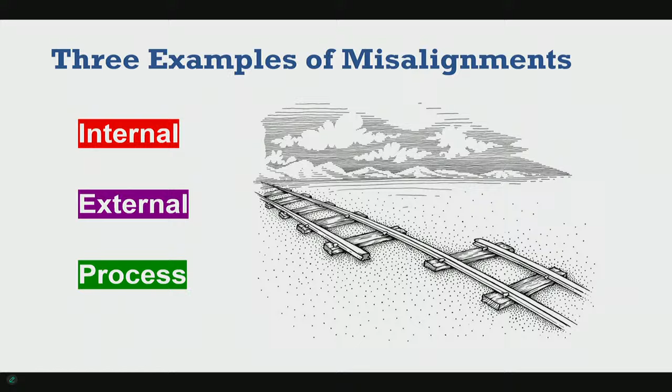So we're going to go forward with an example. One thing we've been looking at as an initial example is active transportation - just one of the first things we're going to look at, to give you an idea of some of the analysis and things we're looking at as we move forward.

When it comes to active transportation, we've got the 2020 Parks and Trails Open Space Plan and the 2016 Bike and Ped Plan. Written up here are the goals of those plans. I know these have come before you as a council and been approved and adopted, so we don't need to review those specifically, but these are the goals of the plans.

As we dove into it, we looked at the costs associated with the projects proposed in the plans, and also looked at some of the impact fee revenues, and noticed there might be a bit of a gap. At this point, we want to continue coordinating with city staff on how these different projects are funded.

But maybe when we talk about misalignment, looking at the recommendation of let's review, if the goal is to implement these plans, let's look at the funding resources and make sure we're able to. And again, this is very high level initial analysis, so this is where we would coordinate with the staff to make sure we're providing a recommendation that's implementable for the city.

We have a question from Councilman McComber. I just think a key point, because we have a lot of residents here, and they can get a little confused because they don't do this day-to-day, is this doesn't take into account when a developer is putting in the trail and that is going to fund that, and then it's turned over to the city.

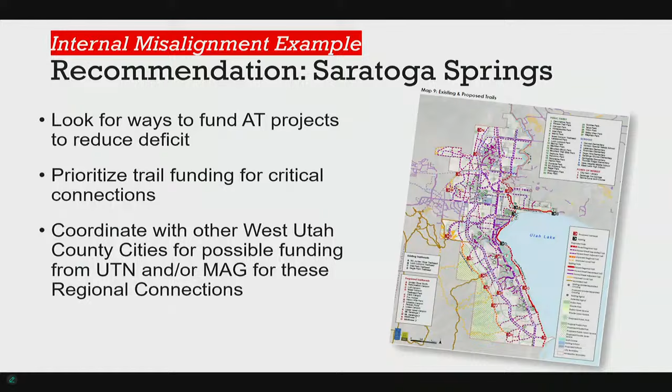And I just want to say it's very high level. And again, as we move forward, we're going to work with the staff, and Mark, thank you for your input, to make sure as we look at recommendations and things that we're talking with your staff and making sure everything is right. But just taking a quick high level look based on those studies, this is an example of what does a recommendation look like? It would be, hey, let's take a look at some of these, and make sure we're on the same page with moving forward and getting these funded, because we all want these trails and things to go in.

So an example of an external alignment or misalignment would be, again, looking at your trails and your master plans, is just looking at the connections between the cities. And I know as part of this project, working with Saratoga Springs and Eagle Mountain in the past, both these cities, as well as the other cities included in the study, do coordinate a lot. So I don't want you to think there's not any coordination going on.

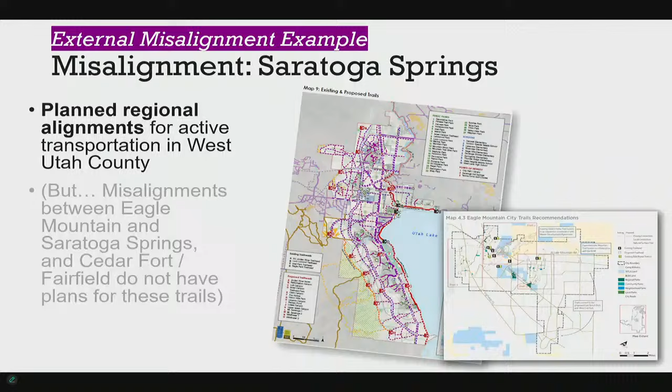But looking at those plans, looking at potential small tweaks to where those trails and things connect between Eagle Mountain and Saratoga Springs. There's also some on the long-range planning for Cedar Fort and Fairfield, where Eagle Mountain has trails planned, but those cities don't have plans. So really, the recommendation would be taking a high-level look, working together, and utilizing the Utah Trail Network, and looking at a regional backbone for trails.

Got another question from Councilman Carn. When we look at West Utah County, why is Lehi not in that conversation? West Lehi. Yeah, that's a good question. I guess I wasn't a part of negotiating and figuring out exactly who was included in the study. But I do know there was a line drawn. I don't know, Tippy, if you have.

I can actually address that. When they were looking at this, we both had, Eagle Mountain and Saratoga both had funding requests in.

That were comparable, so it made sense to partner us together. Lehi was kind of doing their own thing, and adding Lehi would have compounded the complexity quite a bit. So we're not saying we won't partner with them.

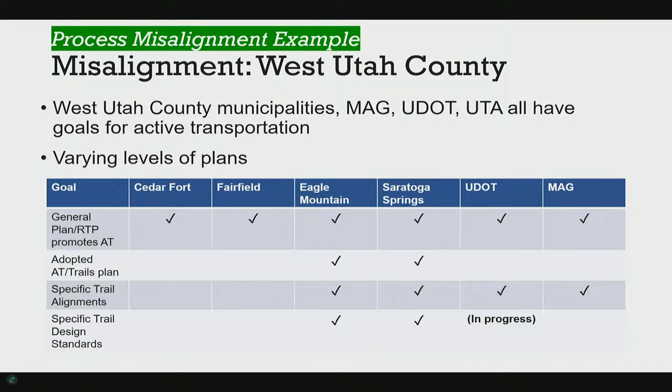Kind of, the other thing we looked at is some of the timing of these plans. We understand that sometimes it's tough to try and align with everyone else to get plans done at the same time. But when you see one plan done in 2015 and one done in 2025, it always makes it hard to stay completely aligned, because things change almost daily. So one of the recommendations, a very high-level recommendation as part of the study, would be: what is a way where we can try and get those planning efforts a little more aligned, to be done around the same time?

Is there a regional plan we can do, maybe as part of the West Utah County area, or what are some things we can do to try and align when we do those plans? That would be maybe a recommendation as part of the plan. And that's an example - that's kind of an initial, high-level example of what we're looking to do based on all of your studies and things like that.

As we've talked about today, active transportation, there's a lot of other topics. As we meet in August, we'd love to get your input and see what are your top priorities. So if you want to take a minute and think about it - we have a list of some of the other topics we're going to be looking at as part of this study - what are some of those topics that are the highest priority to you?

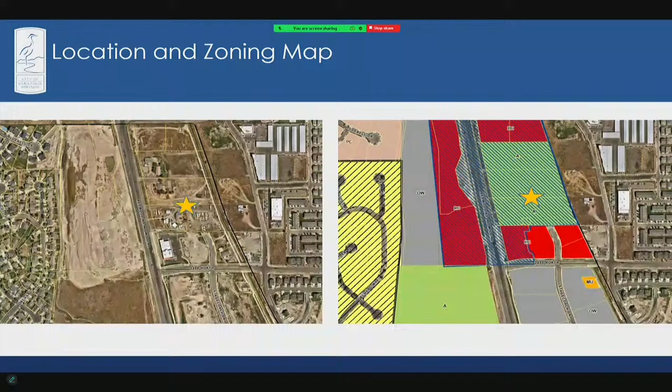Good evening, Mayor and City Council. This is a change of zone request in the north part of town, right on the northern border of the town on Redwood Road, 2472 North Redwood Road, to be precise. You can see here on the zoning map on the right, there's an area in green, that's agricultural zone. The applicant is proposing to change that to regional commercial. This matches up with our land use map in the general plan, so it's consistent with that.

They've provided a concept plan of what they want to do with that. It's 2 parcels of land. They would propose to potentially do 6 lots on that. These would be commercial lots in the RC zone. The applicant is here tonight if you have any questions for them. Would you like to come up and say anything?

Sorry, I didn't hear the question. You can sit just here if you had anything you wanted to add to your request before the council discusses. No, the plan you see up there now is probably one of our first concepts, and we're probably not going to do a cul-de-sac like that. Okay good, because that was going to be my first question. We're like, what is that? Yeah, no, we discovered we can just divide it into 4 lots on that side, and we have plenty of frontage and area to do that.

Perfect, it's much better. Councilman Wilden, you had a comment? Just, if you have any comment on what type of businesses you're trying to attract there. I don't have any problem with the concept, just curious, more of a curiosity. Being in this zone and with the gateway overlay, we're restricted somewhat in what can go in there, so we're just trying to look and market it with that in mind.

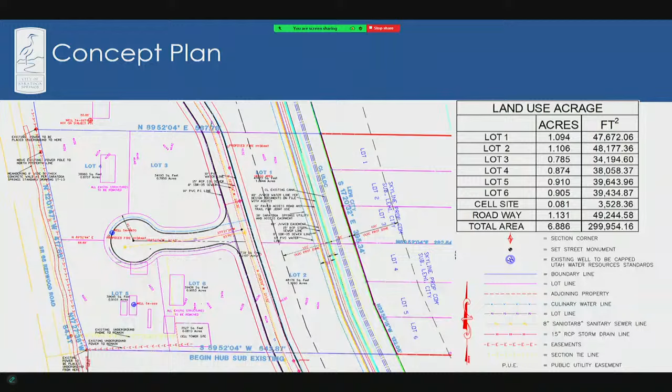Okay, if there's no other discussion, I will entertain a motion. I'll move that we approve business item 1 as stated on the agenda, including all staff finding conditions. Okay, I have a first from Councilman Wilden, second from Councilman Wadman. Any further discussion? Barton? Aye. Comber? Aye. Wadman? Aye. Carn? Aye. Wilden? Aye. Motion passes unanimously.

We have business item 2, the Mountain View Corridor Widening CMT Contract Change Order.

Since Jeremy's not here, I will take it. CMT is doing our construction management for the Mountain project. This is just an amendment to the contract to make sure that we have enough scope to cover the construction cycle. And yes, we are intending on having the project finished by August.

That's the goal. Big conversation going on out there, which is good. When we're communicating, like when people are saying, why are we not waiting for school to get out, it's because you're not ripping up the road the first month of the project. There's other things to do before you rip out the road. That was frustrating me, and I had to bite my tongue because I didn't want to create a conversation. I think that's what these meetings are for, to clarify the steps of a project like that.

I believe we've had the pre-construction meeting with the contractor. They're mobilizing, getting everything done. The first portion of the project will actually be working on the UDOT property, and they will be doing some things that will not be impacting the shoulder. This is what the communication for our residents needs to be. For us it's fine, we understand that, but our residents are asking why are they starting now, when school's not out. There should be an easy timeline out there, showing this is what we do first in a project like this, and UDOT's going to be doing their quarter.

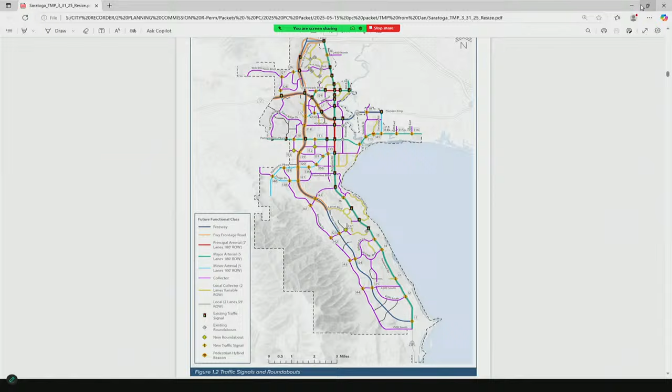We have the Saratoga Springs City Cemetery Site Plan and Preliminary Plat. Sarah, can you pull up that presentation? Good evening, Mayor and Council. This item is for the preliminary plat and associated site plan for Phase 1 of the Saratoga Springs Cemetery, located in Village Plan 9 of the Wildflower Planned Community, just north of Wild Blossom Drive at the northwest corner of the city.

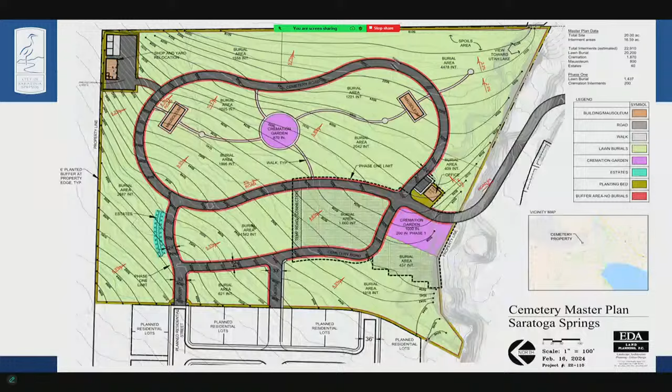Here's the associated preliminary plat. It is for the entirety of the 20-acre site, whereas the site plan itself, like I said, is Phase 1 and comprises approximately 2.5 acres of that overall 20-acre space. As part of this, it does contain...

1,371 grave sites, as well as 265 cremation niches located within a cremation garden, shown on the site plan there. This also includes a temporary office trailer. I have the elevations for which that will be shown on site.

As noted in the staff report, a code amendment will be needed before we can locate that temporary office trailer onto the cemetery property. That is in works and will be brought forward to the council for your approval.

Just a key point, that 1,371 grave sites, that's an actual site because we are potentially allowing double stacking, correct? Correct. So that would be a lot more opportunities.

And again, this is just the first phase. We have the rest of the 20 acres to build out. I was going to ask, how many phases are we anticipating? I don't know, how much do you want to fund up front?

I think it's very prudent that we're starting off with this size. We will know probably within the first year how fast these need to go, and we can certainly add more. Again, the bulk of this project was really to get the infrastructure up there so that we could go.

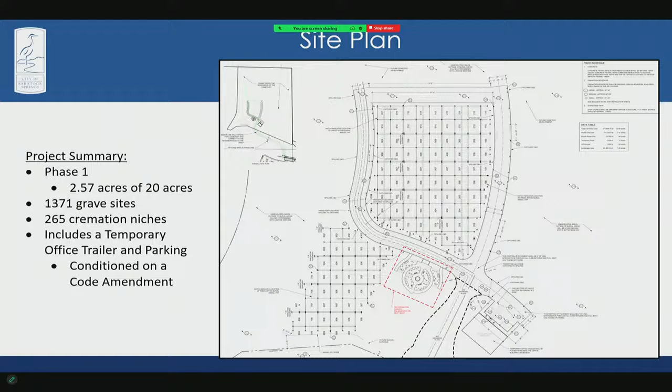Here are those elevations. Like I said, this will require a code amendment that staff is working on and will bring forward. The famous trailer is getting used again.

Is this the wreck trailer? Kind of ironic. Is this Heston's trailer? We moved it. We're gonna die in it. The mayor lived in that. It's a mausoleum. Wasn't this the original city hall? No, we don't have that one. This was down at Ring Road. It's been around for a while, 15 years ago when I got here.

One of the things is when we get done using this trailer, probably after we move into the new city hall, it will get a facelift, a rehab, a refresh paint, clean it, new tile and carpet and all that. We'll rehab it, obviously after the code amendment, and then we'll be able to utilize that on that site for quite some time. It will serve as office space for the park staff that will be working up there, as well as future sales and management and other things.

Can we get a plaque on it that says Mayor's Double Wide? We'll do that happily. I wouldn't, I mean, they were joking about it, but when we're doing this renovation, this is where people are going to be going. They're going to be talking to the sexton and everything, even having some pictures. This trailer's been used in the city for a long time. Let's talk about the history.

Let's be proud of our history that we went from this type of thing where we had offices to what we're building now, to where we're in now and to what we're building.

Was this PD at Ring Road? It was PD originally, a fire station. Fire and police department lived out of it for a time. It was where the firemen used to live before we built housing, then it was an apartment, Public Works. Even some of that is our history, let's capture that.

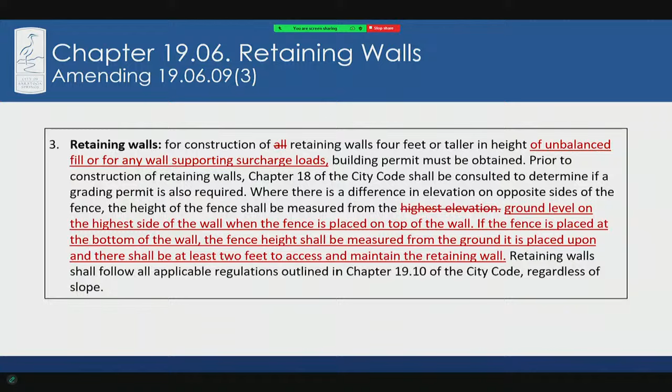Okay, this isn't super complicated. We've just had some differences in building code versus Title 19, and we wanted to clear those up, make retaining walls more safe, and then make sure we are regulating that at both levels. And that's it.

So I'm here for questions. Any questions from staff? No, council? Okay, then I'll entertain a motion.

I move to approve business item 9, amendments to Title 19 Land Development Code, Springs, Chapter 19.06, landscape and fencing for retaining walls, city-initiated, citywide, ordinance 25-37, with any staff findings and conditions. First from Councilman Carn, second from Councilwoman Barton. Any further discussion? McComber, aye. Carn, aye. Wadman, aye. Barton, aye. Wilden, aye.

Motion passes unanimously. We have item 10, the Wildflower Village Plan 5 and Community Plan Amendment Number 4.

All right, good evening again. This is Wildflower's Community Plan 4th Major Amendment and Village Plan 5. So this is the one we had our work session on April 22nd, not too long ago.

Just as a refresher, a community plan amendment includes updates to the grading criteria, creating a new grading criteria within the Wildflower Community Plan. Their grading was approved before we had our hillside ordinance standards in place, and so they've added this grading criteria for only Village 5 and 6, the commercial area shown on the map on the bottom left. This matches our hillside ordinance, which allows up to 25 feet of cut and fill.

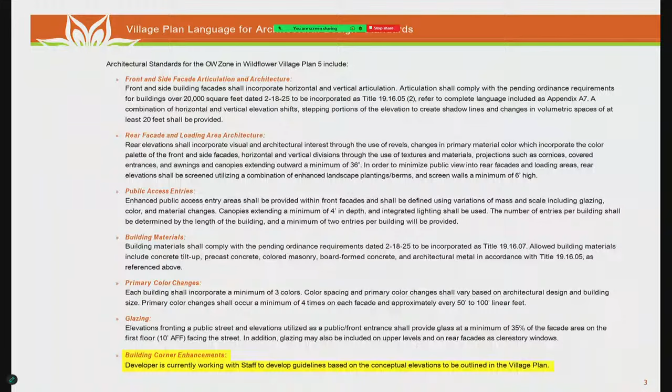The next slide is just our architectural requirements. As Tippy pointed out, we're working with staff, so the highlighted area is the building corners. We recognize we need to address that, and we'll work with staff to have language so there are some standards in there. One thing we wanted to point out is we've done some upgrades we didn't talk about much in the work session regarding the architecture. This is our new design, and Tippy pointed out we need 3 to 4 entries. There will be multiple entries, so we don't have a problem with that. The building is so long that this would be a mid-entry location, so we plan for that so you can see those.

Some of the things we've enhanced our elevations with: we've added signage to both ends so we're addressing the corners, the streets, and the views. We've got enhanced glazing to match the front. It's hard to see because we did a rendering in daylight, but the canopies you see on the corners are illuminated, so at night those entries would have some little extra accents. We've changed the color palette to a more natural, neutral palette that blends better with the hillsides. We've increased the fenestrations, we've got modulated corners, and we've added lighting. It's hard to see, but those linear decorative lights are things we've added to these elevations for you.

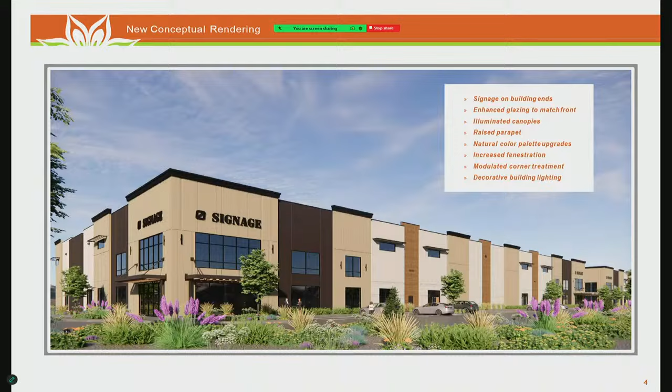Oh, we need to move that down? Yeah, sorry, okay. I like them up there, but too close to the dark sky area. Yes, so those are our architectural changes, and we will work with staff to come up with language that addresses the building corners.

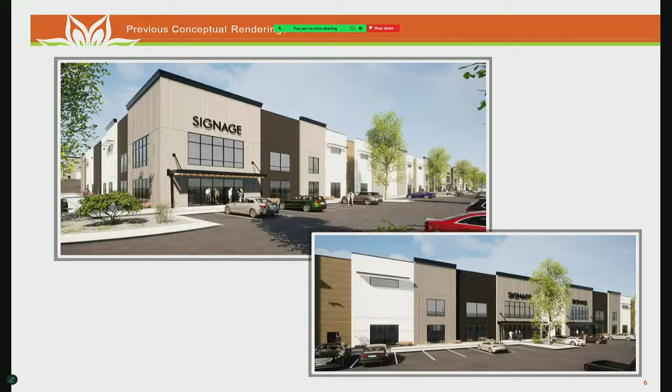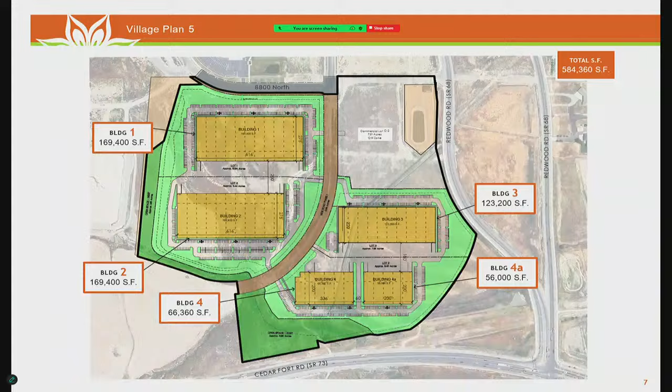Then the next language to be pointed out was the heavy commercial that's in there. We're good, but wanted to discuss with you—I think everybody's had a chance to read the report. Are you good with the process being proposed here, where if we have a user for one of those large buildings 1, 2, or 3, we could make a written request and be placed on a council agenda where we can come in and present to you who that user would be and why it's justified for a single user, because it would be a use desirable to the city. Councilman Wilden has a question on this.

Hey Kevin, just to put you on the spot a little, and you may not have information on this—have you looked at that wording? I want to make sure that process remains legislative versus administrative. I don't want it to come in, the request be made, and it just has to be approved. What request is that again? I apologize. No, that's fine, I know I'm putting you on the spot, but maybe we can come back to that.

It's the heavy commercial, Kevin, where they want to take it to a single user. Okay, let me look at that on my screen. Thank you, I'll be able to see that a lot better. Because we were trying to limit single users so we don't have big distribution centers. But I do think—correct—it's important that it's legislative versus administrative.

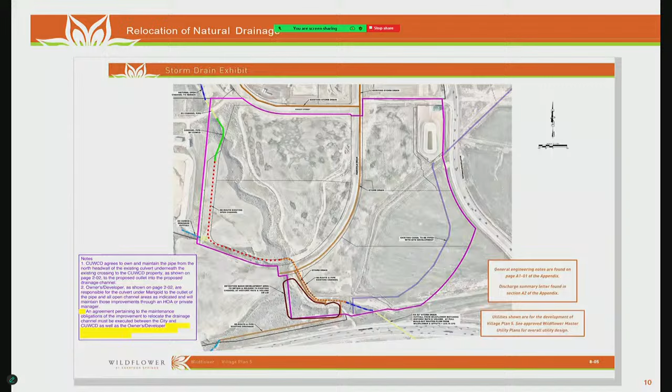From the work session - Tippy, if you want to pass these around, there's 10 of them because it's kind of hard to see. I know there's been concerns about the views and what this building is going to look like, so this enlargement shows the views from I-15. We've identified the NSA building on those, as well as the Holbrook Industrial Park, which was one of Tippy's comparables, and then our Wildflower location.

Very small, but most of those views are from 2 miles to 6 miles as you move down the page. There's a highlight on the edge that would place our project, as well as the NSA building and the Holbrook Industrial Park building, because you can see Holbrook - I call it the skeleton building, no disrespect, but it looks like the teeth of a skeleton, with the black and white. But it is iconic and easy to reference.

So if you've got any questions or concerns about what you're seeing, I'm happy to answer. We've got Greg Magleby here from our engineering office.

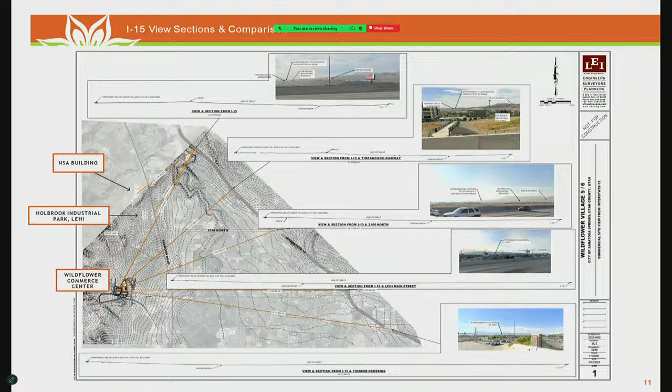They put this together for me so we can answer, but hopefully that addresses your concerns as far as what the views are from far, far away.

The next thing we did was in the work session, we showed you the views from the intersection of 73 and Mountain View Corridor. I've got these now because they're going to be really hard. I like to do it old school. I don't know if we need to pass them around, but this is the view.

So the map that you see here has 4 locations, and our first one was a mile away, the intersection of Crossroads and Redwood Road. Nikki, can you? They're kind of small, I can scroll.

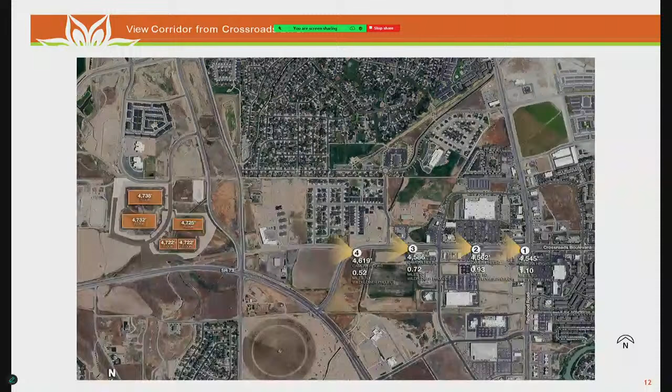No, this is the 4 different spots on the picture. So 1, 2, 3, 4. So we start at 1 mile, and then we go to 0.93 miles. They have the picture - yeah, that's view 2. On the screen, you can see before and after construction.

I was gonna play Where's Waldo with you because it's kind of hard to find, but as we progress down that roadway, our last one is a half mile from that location, and that's where it's the most visible. But because of the color changes that we made, I don't think there's a concern anymore.

It goes to the senior community. Priscilla, just for the public record, the boards show the at-construction-completion picture that is on the screen, so you're not missing out if you don't see the boards. So the one that shows it on there is the farthest one away, so it's gonna be bigger as you get closer. It really doesn't come into view until you're about a half mile away, between stations 4 and 3.

And you didn't put in the freeway. I have those pictures here if you want to see those again, because the flyover is gonna block it. Eventually you won't even see these buildings, you're gonna see the flyover from this vantage point. I have those if you want to review them - I brought them with me, and I have them in the presentation at the end.

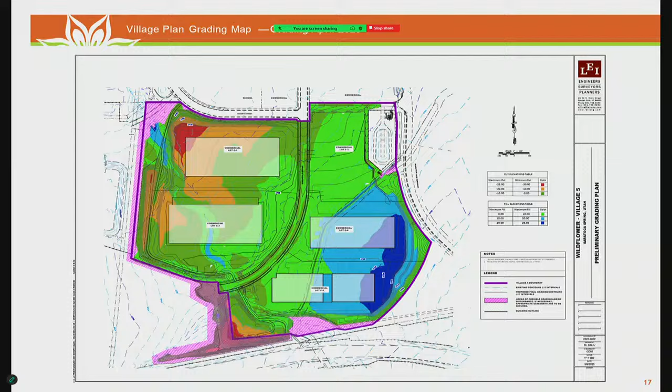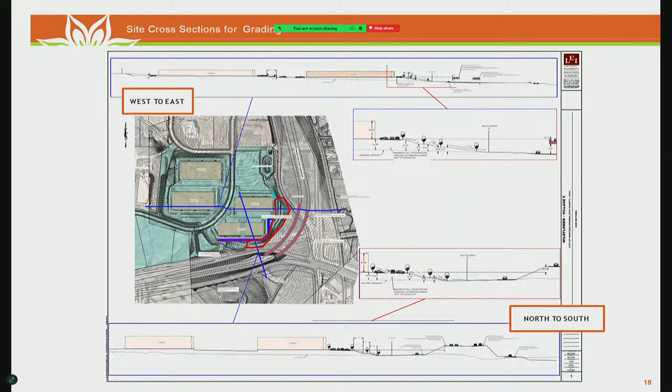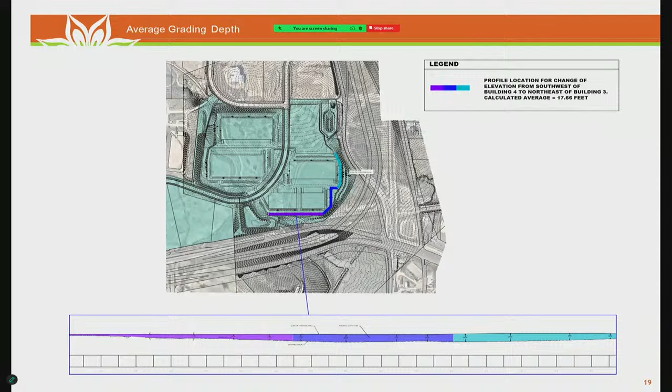But I figured since we went through the work session and you've got a full agenda, I would be brief. I believe we worked out all of the grading issues and understandings in the work session, but I do have Greg Magleby from LEI here. If you guys still have concerns about grading, this is the updated grading page. These are the cross sections that show the depths, heights, and slopes we'll be feathering out to the property line. This was our average fill depth based on those colored maps - about 17 point something, I can't remember exactly.

So I think it's a related topic that I would love to get your input and information back on as to what's going to happen there. But we are asking and hoping that it would stay OW and not become HC, just because there's some uses that get eliminated. When we made application and planned this community, the 2019 code was what we made all of our plans under. Hopefully you've seen that we have adjusted and adapted, and we're willing to take on your new codes for design and definitions. With that, I appreciate your help.

Okay, Councilman Conover. So I just have a couple things. The architectural changes - I appreciate a lot of the changes that were made, especially the elevation changes. The buildings that were on Pioneer Crossing even have greater elevation change than what you have, and I was hoping you were going to at least go back to what you had and then make it more. But you don't have the elevation changes because it really creates almost like a retail feel, even though there's the big doors in the back.

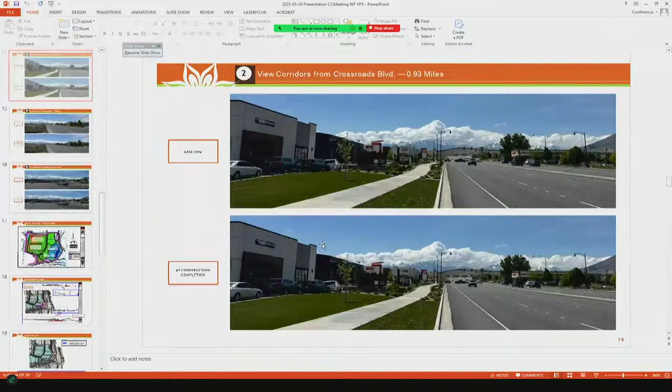You have a huge section there, 1, 2, 3, 4, 5 verticals with no windows in the one plan I'm looking at. You have 2 windows, 5 panels, no windows, and then 2 more windows. I'm just looking at page 25. They can actually go back to it because they have the picture of it too in their presentation.

A little bit further. Oh, wait, did I not? No, further, it was the elevation.

That's not it. While you're looking for that, basically I'm having a hard time, because this is a legislative decision and I don't have what the corners are going to look like. So we're just saying, oh yeah, we're going to make them nicer. But I'm looking at 1, 2, 3 council members who live in this area, 2 former council members who live within a mile of this area, who are going to be looking at this every day. So we talked about, let's make a difference, and don't just plant trees thinking that trees are going to block the building.

Okay, so more windows again, and then the architectural changes. If we do choose to pass this, I hope the council will support me in making a condition that, based on staff coming back to us and saying they feel like the corner elevations and intent is being met by the developer, instead of having to come back and potentially make another decision, I'm okay deferring to staff for that. But some kind of condition that allows staff to make sure the corner elevations really are improved.

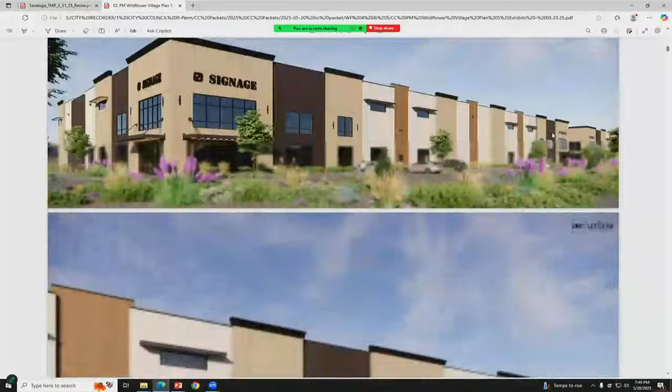It's my understanding that staff is working on regular corner guidelines to be added. We are working on something like that. Right, but I'm just saying, with their corner, like a condition that says staff is in agreement that this is an enhanced corner, because we're trying to get them an approval, but I have a hard time approving something that I can't see.

So right there, the corner is not how it's going to look, it's supposed to be more enhanced. And then you can see the 5 panels in between the windows. Those are small windows. Yeah, that's what I'm talking about, but if you look at 2100, they have those small windows across the entire side of the building, and it really creates a more retail environment versus a warehouse environment. Because a lot of these uses are going to be more retail in nature, like Pioneer Crossing, jump houses, and so on.

One of the conditions in the staff report, they did not add language that addresses the corner. They did add this image, and this image is their proposal for the updated corner. So I want to be clear about that. This is their updated corner, their proposal for the updated corner.

If you would like to see more, we need to be specific in the condition. I would agree that we have upgraded that corner, but knowing that the corners, we didn't know that we needed to add a section for corners. So we're willing to work with staff, knowing that they're working on corners, and take your information in as well.

So this doesn't feel enhanced. This feels like you've changed the color. Well, this corner's not—if you look at your drawing, you and I go way back, and we've done this many times. But it looks exactly like it was when it was white and gray, and now it's brown, but the corner still looks the same. Well, we've added the sign.

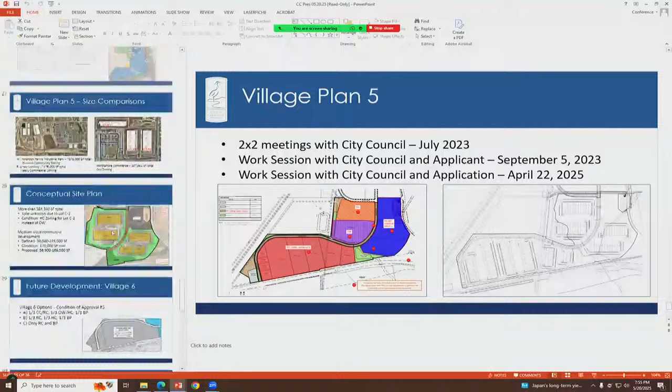This is where legacy information matters—people who've been around a while and part of these conversations have a lot of value. As a city council member, I've seen this project from the very beginning, from when the freeway was approved. For me personally, that's no longer a vested right for office warehouse there, because you've got all this concentrated office warehouse, which wasn't supposed to be that way. When we made the decision, and there are people in this room who made that decision who aren't sitting up here anymore, we said mixed use for all throughout this, and this huge section is no longer mixed use. Councilman Connor, C2 would actually help with the reduced use, creating a buffer between those neighborhoods across the street and this development.

I agree, just have it be RC, regional commercial—you can get a lot of stuff in there, not only to the north but to the east too. I think we all agree on that. Technically, if we really look at these warehouses, they're far enough south that they got this vested right even before the senior community was put in. So the people in the senior community knew what was coming across the street, in my opinion. But the people north of this did not know, because this was supposed to be mixed use, all different kinds of uses here. So thank you, Chris, for your insights as well.

So in terms of your requests, the condition for considering the drainage system, I have no problem with that. Just to give it again a little context—I'm one of five, but if they're trying to get this drainage thing figured out, that kind of contract... I know what we were trying to say is we don't want a bunch of other contracts going on around, but in terms of the drainage, it seems logical to me. But please, go ahead.

Our condition of approval was to have the agreement executed before this could come to council, which is our standard for any village plan or community plan application—to have an executed agreement. So that's how we drafted it. With the latest changes, we said we still needed that executed agreement, but just past this step of city council approval. So she's asking for a building permit, having the executed agreement before the building permit, not before. Well, we'd have the agreement before the building permit, yes. If you're okay with that, then if we do that...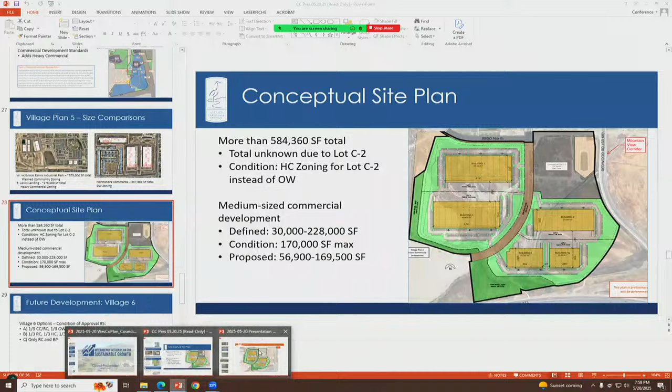It's something we can take a note on to update. I keep looking at some of my old peers because we've done so much work on code over the years that there's always going to be changes. But I didn't have a problem with the definitions to fill the gap because I believe transparency is key. And when there are mixed or conflicting definitions, that's when we have problems, like your previous project. We had a lot of issues because we had some definition conflicts. We worked through it, but it was painful.

Okay, so I covered all three of the main conditions, I believe. There are 4 requests that they're making here. The one that hasn't been covered yet is that HC zone properties shall follow city code for standards not identified in the village plan. Staff doesn't have a concern with that. And then condition 8E, staff doesn't fully understand the concerns with their alternative suggestions. There's language in the proposed village plan related to what uses are and aren't allowed, and staff's condition is that we also include the definitions in Title 19. We don't actually see any discrepancy between the two that should be causing concerns, so we're not fully understanding it.

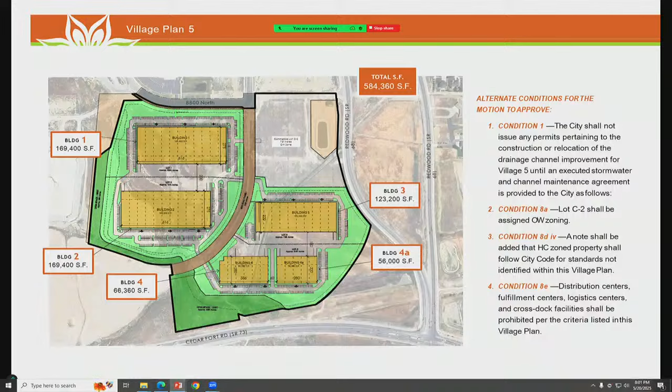I don't want to see any more office warehouse, any more heavy commercial. And on lot C2, I'm actually not even comfortable with heavy commercial - I would prefer it to be RC. The reason is that piece is closest to the existing homes. If we leave it office warehouse, there will be storage units there; heavy commercial, we could have a pawn shop, office high intensity - I don't know what that is, it just sounds intense to me, I know what it is, I'm joking. But the point is, I'm not comfortable anywhere with heavy commercial at this point. The door is still open, meaning you can come back and ask for a rezone, but we need to protect the existing homes in that piece. The only reason, or part of the reason, I'm considering this is to get the office warehouse and heavy commercial away from existing homes.

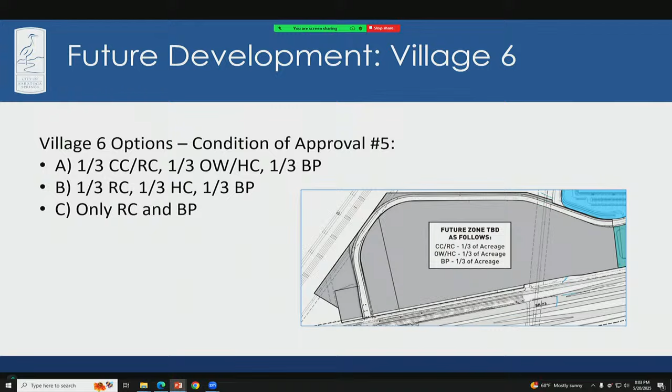And we already talked about that, I just addressed it really quick. Just wanted to remind the council that there are 5 options in the community plan, not just regional commercial, but neighborhood commercial, community commercial, regional commercial, business park, and office warehouse. So among the menu of options you had all 5 - neighborhood commercial, business park, regional commercial, and community commercial. So I'm good with putting those 4 into Village Plan 6, and then C2 is not heavy commercial or office warehouse.

As far as the various recommendations, I'm not heavily opposed to it, but the reality is we've gone through a long process here, and in some places we're even in opposition to staff recommendations. I'm going to stick with the recommendations at this point, other than the one they seemed really comfortable with, which was putting primary in front of distribution.

So you're against not having one around the drainage channel, the storm drain? The timing of the permit. I would prefer to stick with staff's recommendation at this point. We've gone a long ways, and I need to stick with staff's recommendation because staff wasn't overly excited to get back to where we are today. So I'm going to be supportive of their recommendations. Although some of them don't seem all that unreasonable, I'm not seeing all the potential unintended consequences if we change those. I just don't know what they are.

Do you have a comment on this, Councilman? Add on to his. So my question is for option C. The current staff recommendation is Village 6 shall be comprised of RC and BP only. Are you open to making that RC, BP, NC, and CC? And NC, yeah, okay, all four of those.

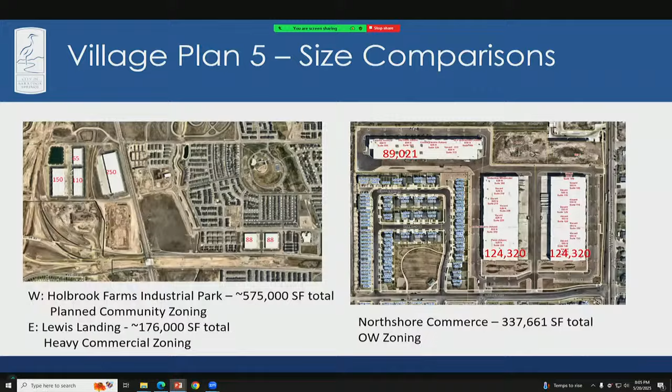Which number is that? Oh, let me go to it. I usually remember them all, but when we have like, it's a lot, yeah, that's the problem. I was trying to read through it.

It's 8D2, and it just says increased standards shall be added for building corners. So we don't get into the specifics, which we think could be a good idea, to be more specific here. The applicant did have a list on their presentation of items they've added, but not percentages or anything like that, just to match the elevation that's proposed. So if you would like to see more than what they've proposed in their elevation, I think that's important to make note of.

Yeah, I don't know how to do that, but I think we could delegate that to staff, with conditions that allow it.

You look super uncomfortable with it. Well, the reason I have some discomfort with that is it's hard when we have anything that's ambiguous. You can't read our mind, is that what you're saying?

So I think a better condition would be that the elevations can come back to council for approval, but it also needs to have greater enhancements than what's in the proposal. Like the site plan would come to council? That one item, yeah, just looking at the elevation. We move this forward. It would get my vote if they had that. So it would be a condition that at site plan approval, it comes before council with the architecture, with enhanced architecture - additional windows, additional.

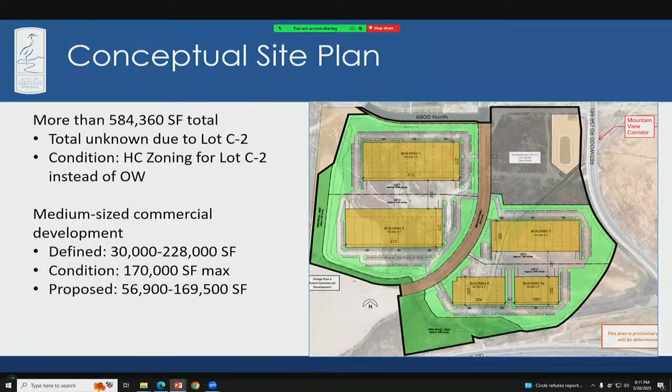Okay, I will entertain a motion. I'll try this. I move that we approve business item 10 as stated on the agenda with staff findings and conditions with the following modifications. First, where it references the definition of distribution points, adding the word primarily. Did I get that right? Primary use.

Condition 5, using option C with a modification that it may only include neighborhood commercial, community commercial, business park, or regional commercial, and no office warehouse or heavy commercial. Condition 8A, Lot C-2 shall be assigned regional commercial zoning, or neighborhood commercial, or community commercial. But no office warehouse or heavy commercial, thank you.

Modifying condition 8D2, where it states increased standards shall be added for building corners, we're going to have that be returned to the council to review enhanced standards and architecture for the building corners, which shall be a legislative decision—building corners and sides. And I'd like to see those as documented standards, not just visual images. That's it, and I'll second that.

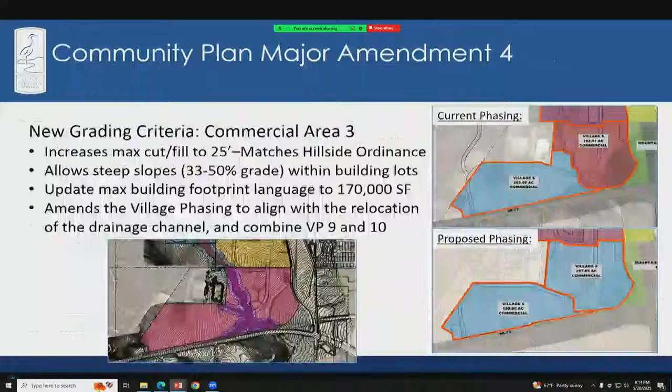Because they got it last time. Right, right.

Are we still waiting on number 9? Do you want to take these? Sarah, number 8, here? He's still not here. He's still not here.

Should we table it till next week so we can move on? It's complicated, so how about we present it, and if there's issues, then we can table it. If there's not, we can make a motion.

Okay. We, they, us. We as a city. Item 8. The collective we, we as a team. Collectively, of course not me. Of course, not me.

So we're on 8. Yep. Do we need to announce it, or? Yes, okay. Business item 8, Wildflower. Yes, 8. Oh, no, we're good, go for it, okay.

Awesome. So this is Village Plan 9 in the Wildflower Community Plan. It is proposed to be a combination of Villages 9 and 10, which was just approved with the Community Plan Amendment, so that has been taken care of. This is the final residential village plan within Wildflower, and is the largest one. It's part of the Planned Community Zone.

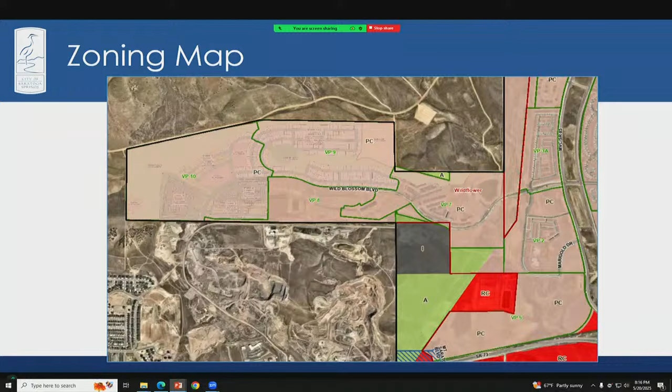Our applicant, who is not here right now, is BJ Ryan with Lennar Homes. So we'll go ahead. Here is the zoning map, like I said, part of the Planned Community Zone. The zoning map here shows VP9 and VP10. As stated, this is a combination now of those two village plan areas as outlined in the community plan.

The total acreage of this area is 311 acres. Of that, about 110 acres will be open space. There are a total of 1,022 residential ERUs proposed as part of this.

This is consistent with the community plan, and I have a slide that goes through it. Of note, there are 644 of those ERUs that are supposed to be single-family as outlined in the community plan. That's type 1, 2, and 3. There was a mistake in my staff report—type 1, it's a typo in the village plan itself as well. It was shown as less than 5,000 square feet and then greater than 5,000 square feet. Those type 1 are actually greater than 5,000 square foot lots. So I apologize for that typo.

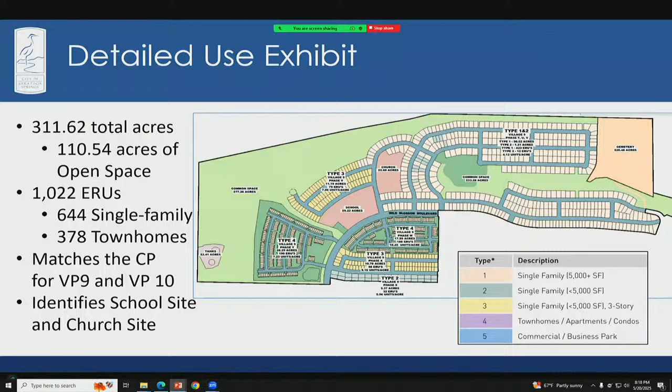As stated, this does match the community plan for VP 9 and 10. As part of this as well, it does identify a future school site and church site. Those type 4 units are the multifamily units—they will all be townhomes for this development, so there won't be any apartments or condos as part of this, it'll all be townhomes. Here's another look at that detailed use exhibit.

The other thing I'll mention as well, Wild Blossom Boulevard—you'll know it terminates at the south there. Staff has had conversations with Eagle Mountain about the alignment of that road through Eagle Mountain and what that connection will look like. Hopefully that is happening sooner rather than later on the horizon, but we have been present in multiple conversations discussing that alignment and what that might look like.

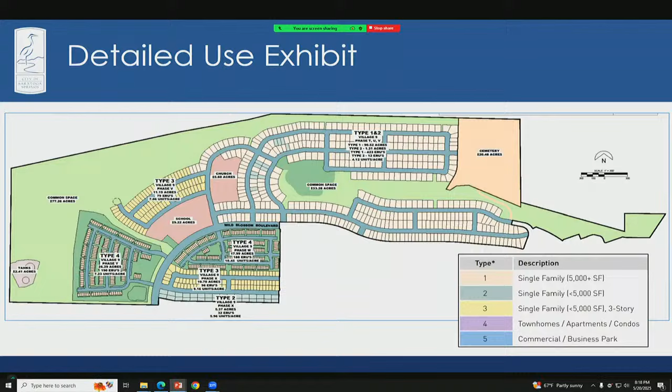Getting into the ERU transfers, as stated, the 1,022 ERUs proposed with this is consistent with the CP. They are utilizing multiple transfers that were permitted through the amended and restated master development agreement for this property, as well as in the community plan. I have them noted there: 31 units that were transferred from Village Plan 8, which constitutes 3% of the 15% max ERU transfer allowed by the community plan. And then they were allotted 14 type 4 units as part of a transfer for the city cemetery property, which is also part of this village plan area.

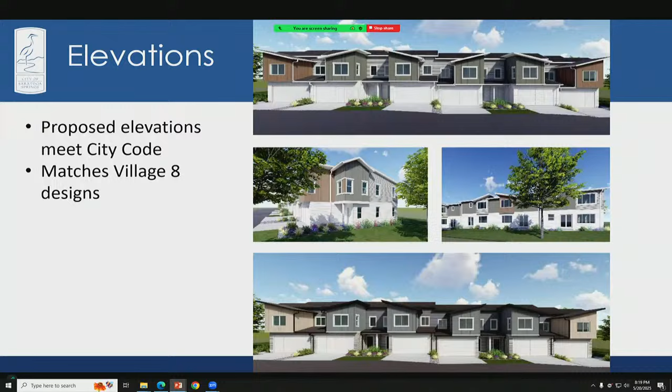The elevations and standards included were proposed to be consistent with city code. They'll match Village Plan 8, and the applicant is proposing to meet all of city code on those. Any questions you have for staff, I'll be happy to answer.

Councilman McOmber: this is in line with what we originally approved, and the transfers were all very transparent—it says complies throughout. But my concern is they don't comply.

Their existing phases still don't have their open space available. These people are paying $300 a month, which is crazy HOA dues for this city, and they have access to nothing—pickleball courts with no nets, no fencing, a huge pond they can't even use, a dog park with falling-over fence pieces. How is that a dog park? I'm very concerned with approving more when they can't even deliver on what they currently have.

I always comment that I love how it says 'can comply' or 'complies' all the way through, but this developer has proven not to comply.

Tippy, addressing the council: Lennar Homes, the applicant for this village plan, is different from the previous developer, DAI Utah, who was responsible for those open space areas. Lennar just took ownership of those applications in the last couple of months, and we've seen a lot of progress, specifically on the lake and the dog park.